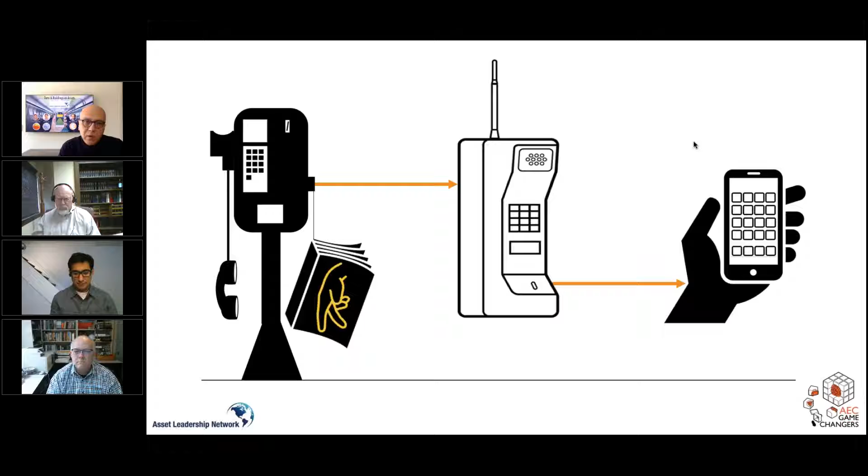So with that in mind, this session is really about the opportunities that we see, and it's not really even about the future, it's about the present. How do we bring the building industry and the asset world into the present and use these technologies?

So our first speaker is Finith Jernigan, author of Big BIM, Little BIM, and the latest book, Big BIM 4.0. Finith, welcome to the webinar. Yeah, thank you, Kimon. I'm real happy to be here and happy to talk about what is a topic very close to my heart. Spent a lot of years on this. Can we go to the next slide then, Kimon?

Okay, so I'm going to continue Kimon's framing of the issues and some of the things that our clients have found to be critical in the last 10 years especially. Over the last 20 years, a lot of the energy from a national and international level has gone to building standards that really are intended for a distant future vision that has always appeared to be somewhere out there, but we're not going to get there for a long time.

As Kimon said, as iPhones and iPads and connected technology have come along, we've been moving away from the core of file exchange, welded together monolithic application-directed tools that are now becoming artifacts of the last century. We're running into a situation where everybody except the AECO industry is really working with standards that are very flexible and easy to use in the real world.

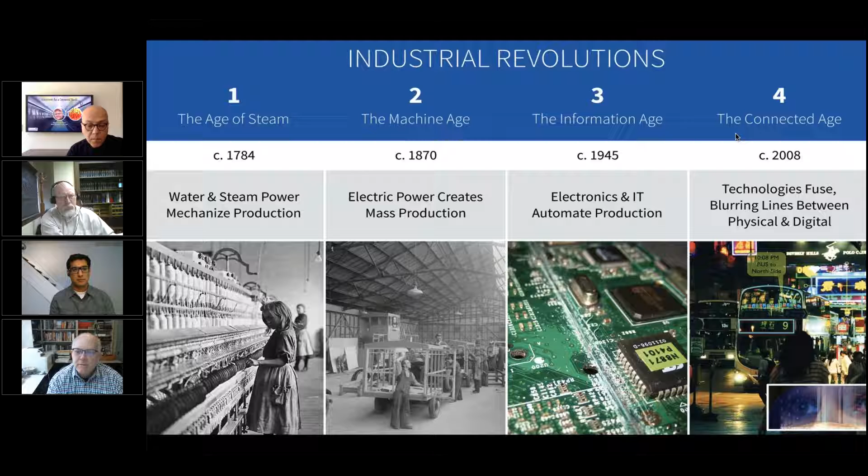We have things still tied into the computer, still tied to file exchanges, whether digital or paper, and yet most of our world is now working with something else. In the AECO industry, we need to find ways to move beyond that.

What's ended up happening, because we've been so focused on what I call Little BIM, the file-centric desktop software side of our world, is the focus has tended to be on the design and construction part of our business. It's largely ignored the balance of our world, the 82% that's outside of that. Even facility management and operations, a really critical part, has gotten very minimal attention in this area. We need to move beyond that.

What we've seen is our clients are really focused on moving beyond just design and construct. It's becoming imperative that things move from construction into operations and maintenance. I think you'll hear when James talks about issues with funding and financing, that whole recapitalize, dispose, acquire piece, and how that affects design, construction, and the rest of the industry, because money, time, and buildings are all starting to merge at this point.

Just so this doesn't seem like something out of the blue, that we're sitting around postulating about possibilities, we started back about 2000. Kimon and I actually worked with the Coast Guard back then, looking at ways to make these transitions. In about 2008, Mike Bordenaro and Kimon put together a program called the BIM Storm.

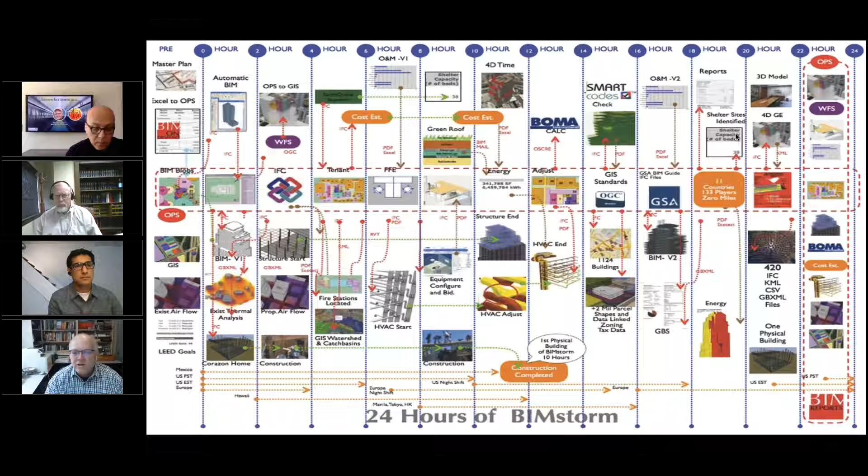This graphic shows some of the data exchanges and information exchanges that happened in that very first BIM storm. Many more have been done since. Kimon is going to show some project work at the end about how these things come together at a much bigger level now. It's become much more sophisticated, nuanced, and accurate over the years.

Basically what's happening is Big BIM, as I call it, sits at the center of an ability to share information from all the different components that make up the built environment—geographic information, budgeting information, facilities management, operation and maintenance, the information built in the models (Revits, Teklas, ArchiCADs and other Little BIM software tools), energy information, live data from thermostats and sensors. All of that now feeds to a central point and flows back and forth within the tools we have available, and it's getting more sophisticated and developed all the time.

As we show these, Dara's going to talk about a major project in China, and Kimon will show some major projects they've been working on all over the world. But these things are happening at a much smaller level too. This is one of my clients, a single facility school district, and people at all levels are using this. It hasn't quite gotten down to tying into residential Internet of Things yet, but it can. It is definitely getting down to the level of tying in at a single school.

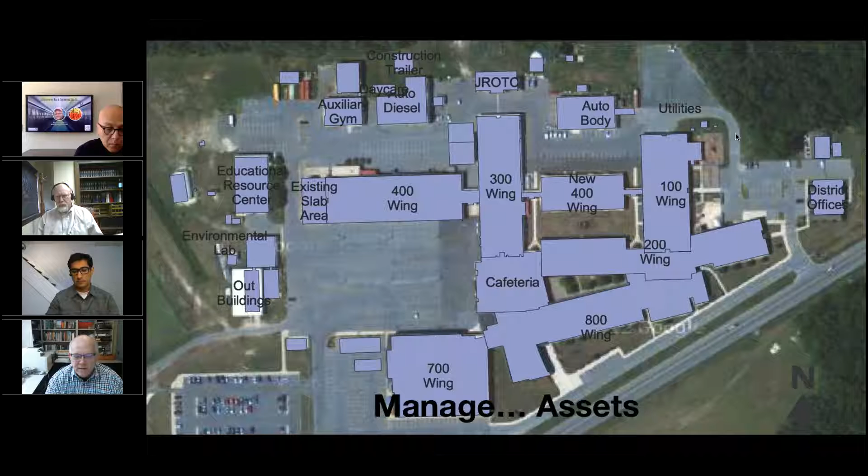One more, Kimon. One of the leaders and first in this - this is a graphic from the Coast Guard, when Kimon and I were working on a project they called the Shore Facility Capital Asset Management Roadmap. People have been prototyping and working on this for many years - this graphic, I believe, was done in 2002 or 2003. So there are people that have been doing this for major owner groups for many years.

One of the first lessons they learned is they had to focus on their assets, not just their projects. When you focus on a project, you're looking at a very time-delineated piece of work - we start the project, we finish, we move to the next. When you focus on assets, you have more of a continuum - you begin to view the world as a continuum. So one of the earliest lessons these clients learned was they had to focus on assets.

And they learned that with these technologies, you can actually connect assets. In the case of the Coast Guard, they were connecting their ships and boats to their facilities to make the interfaces between them work better.

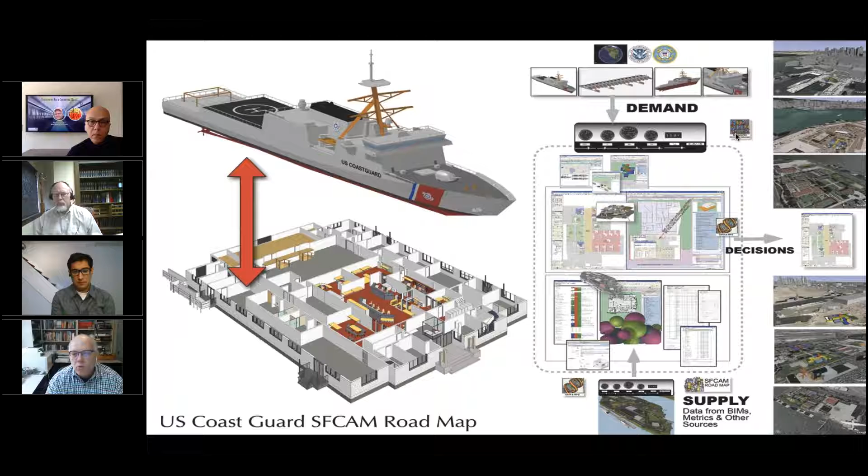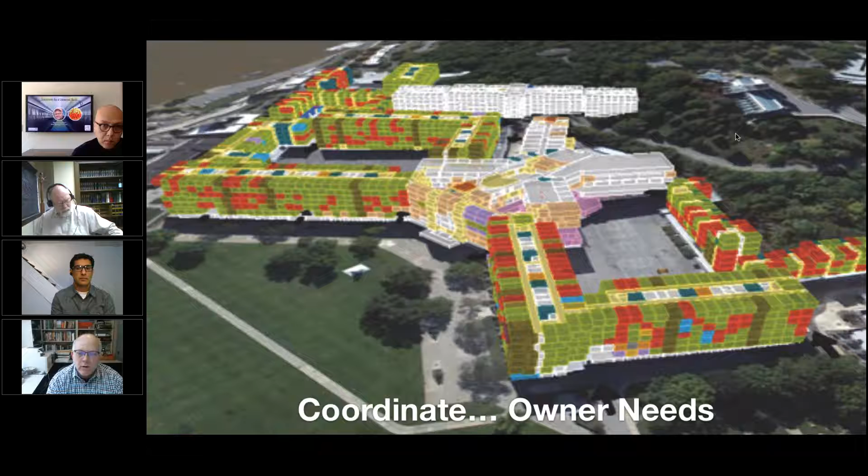Come on, one more. And the Coast Guard's not by far the only one. This is actually the barracks at West Point Military Academy. In this case, the owner is looking at having to do major renovation to historic infrastructure, historic barracks, and they have thousands of cadets moving in and out of spaces. They're having to play the chess game of moving people from one area of an occupied building to another in a very constrained environment, where these graphics show how you manage the overloading of spaces, how you manage crowding within the framework of contractor laydown and contractor access.

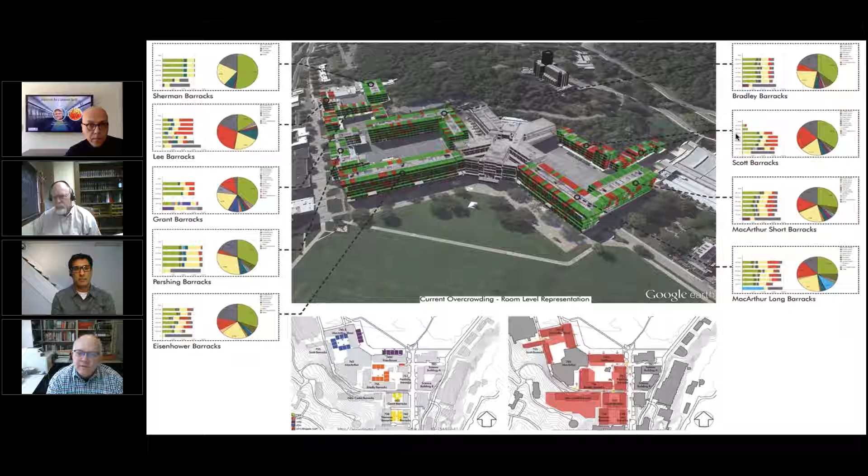So in this case, this is a mashup between all of those things to be able to study them in real time.

The clients doing this type of thing have now gotten to the point where they're able to create views of their information all the way from the satellite view, zooming right in down to the smallest widgets. These are what I call little red blob models - they're just screenshots of live data, in this case on Google Earth, where you zoom into a campus, then into the buildings, but at every level the data is live. You can get to any data at any granularity you need, and manage millions and millions of square feet, hundreds and thousands of buildings, all in one interface, where before these were kind of rigid, fixed-point graphics. Now every one of these blobs is a live model.

The one on the left is actually a model that we generated for my new book. It's publicly accessible, where you can actually see how you can drill down into these.

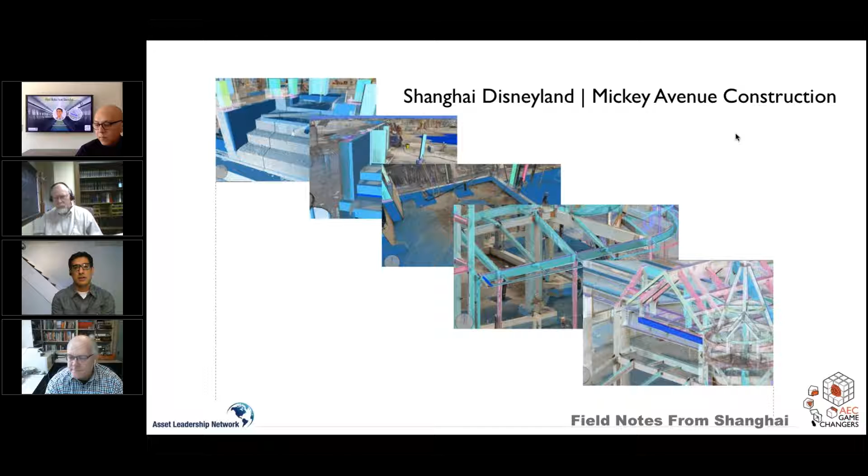Thank you. Can we go to the next slide, please? This presentation will be my field notes from my experience at Disney Shanghai. I was involved with this project for about 2.5 years, and I spent time on site during construction of the park.

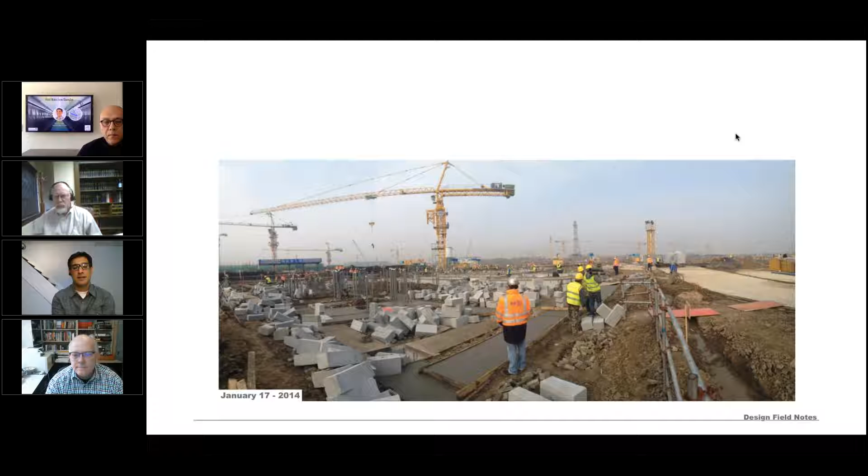This is an image of the park on January 17, 2014, about 3 years ago, showing 1.5 meters below the finished elevation of the park. Contractors and workers are there, CMU blocks ready to pour the foundation. From there we had to go to this: 2.5 years later, on June 6, 2016, when the park opened. It was a very fast-paced project relative to its sheer magnitude.

The orange area is the area I'm going to focus on. This is called Mickey Avenue, the equivalent of Main Street in any Disney park, very typical, on axis with the castle. I was involved with 4 buildings on Mickey Avenue.

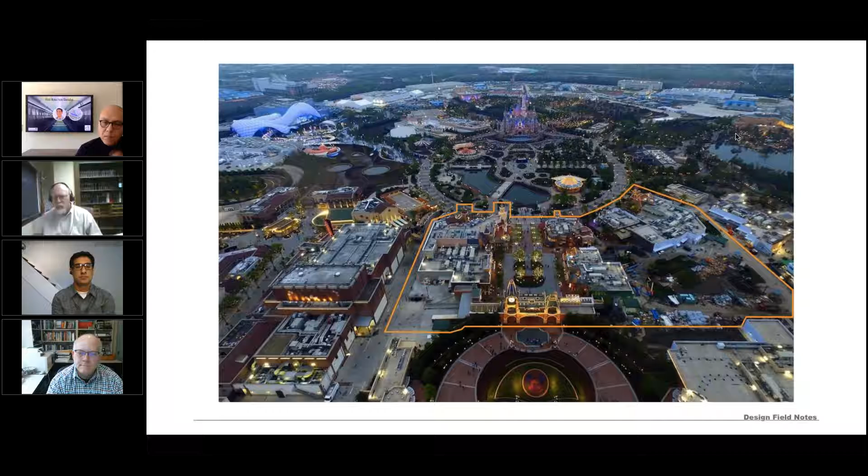The buildings on Mickey Avenue consisted of character facades. We had about 70 numerically assigned facades, and each facade, as it turned different corners, would have more, so we had about 200 facades to work with.

One of the main ingredients of a facade in a Disney park would be TCP, themed cement plaster. We did a very rough calculation and had about 8,000 square meters of plaster to work with. It was a daunting task.

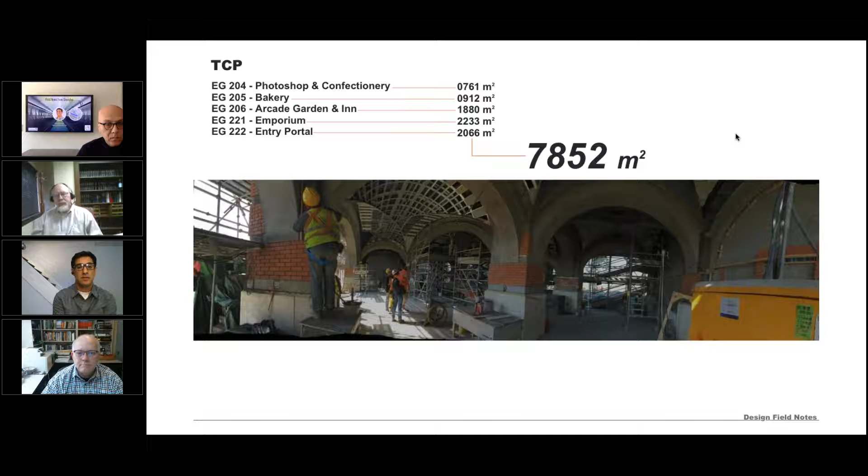During construction, we had close collaboration with construction workers, the CM, art directors, and also a creative director going from facade to facade to make sure everything was happening correctly based on the design intent and the drawings.

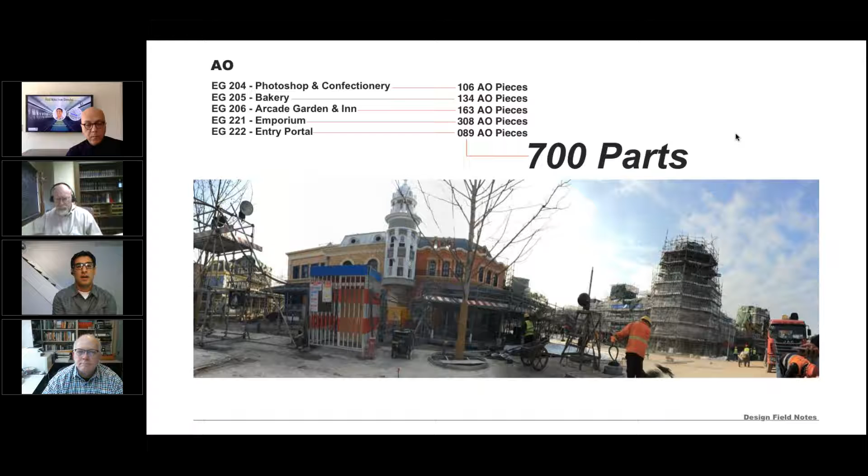Another ingredient was the AO, the architectural ornamentations attached to the building. We had about 700 parts, but each part had sub-parts, so we had thousands and thousands of pieces we had to keep track of prior to and during attaching to the building.

The building structure was quite simple. We had a spread footing, and the footings were attached to one another using grade beams, then we had stem walls, and the slab would rest on the stem walls.

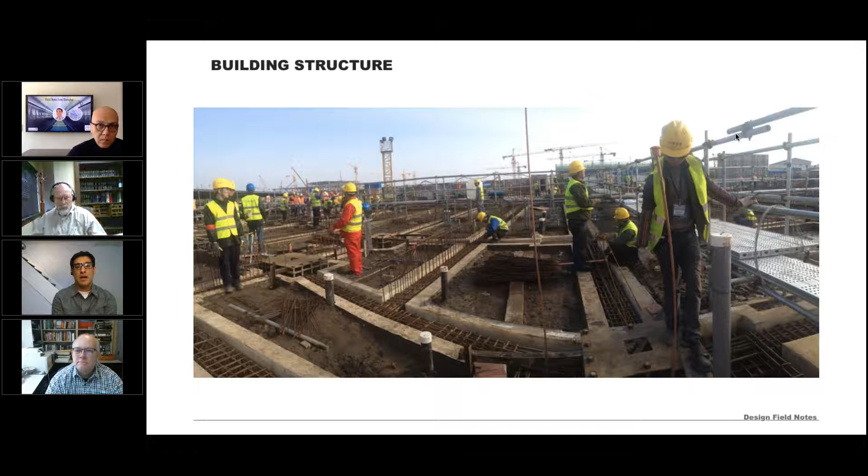This is an example of the first building. The contractor decided to use CMU blocks to do the formwork for the foundation, which had a very irregular geometry. But he also decided to tie the rebar cage away from the foundation and then lower one geometry to another, which caused a lot of problems. The sequencing was all off, and we lost about a week from our schedule.

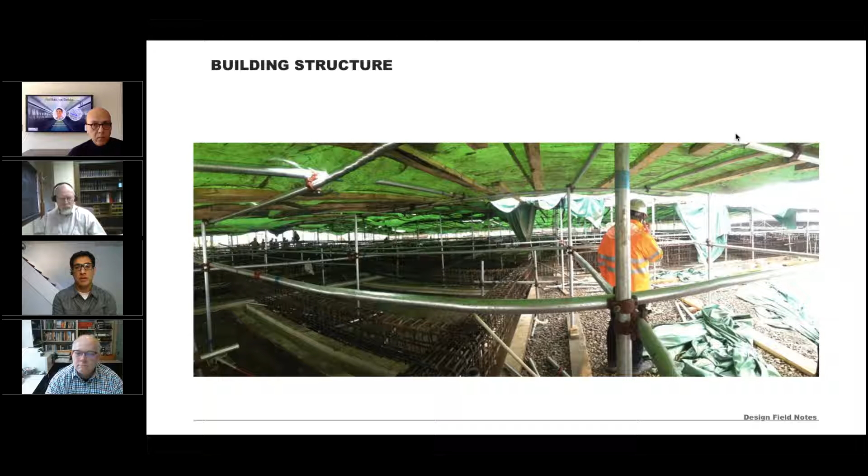So that was the time that we knew we were going to have a lot of problems ahead of us, so we had to come up with solutions.

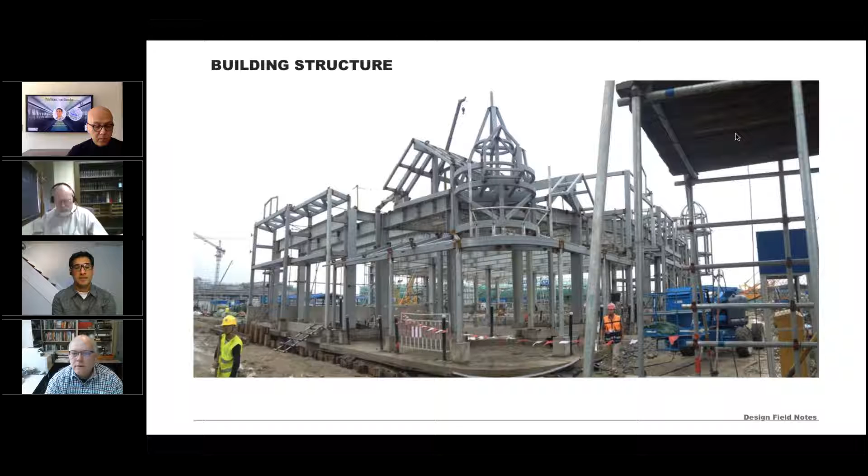This is a typical building structure. The building would divide up into two segments: the primary structure, a steel moment frame, and the secondary structure, which was welded connections connected back to the building. These secondary structures served as a skeleton of the facades.

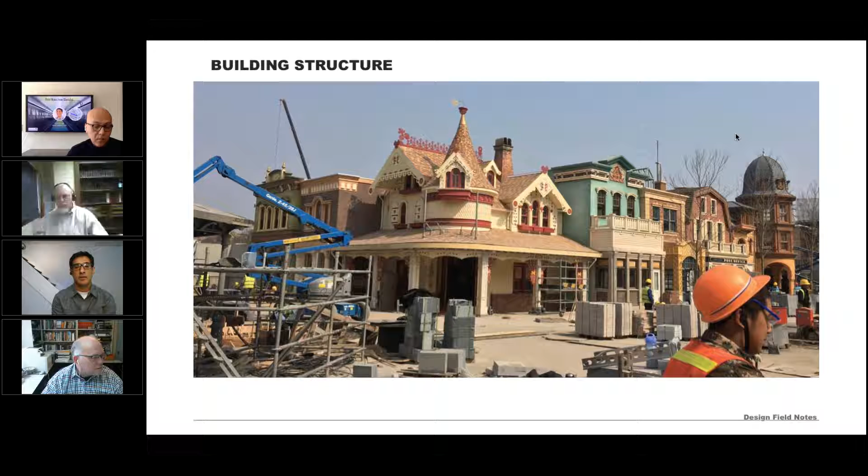So it goes to this. That was a building about 85% done, and you can see a lot of activity going on at the same time. So sequencing was a major challenge, and also being able to allow all the trades to work with one another to hit the deadline.

So the challenge for us was how to keep track of all this. This is another view of a facade. There are many, many stakeholders involved with a themed building. Our job as architects was to get all the input from the stakeholders and aggregate all the information. One of the things we did was rely on software for the long term.

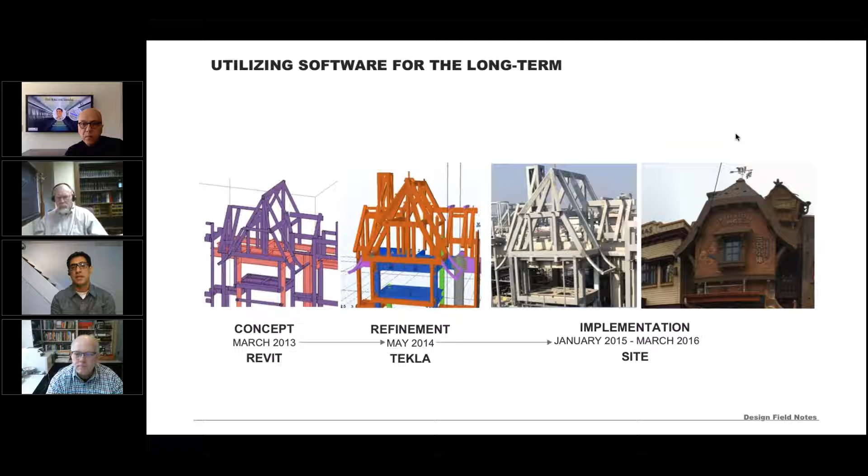This is an example of the evolution of the structure of one of the buildings. We started with Revit, had all the information in Revit, then migrated it to Tekla for the structural model. From the Tekla model we created fabrication drawings, and from fabrication we were able to do the framing of the building. As you can see, March 2016 was the final product. So it was a 3-year cycle, but we were able to use software for the long term.

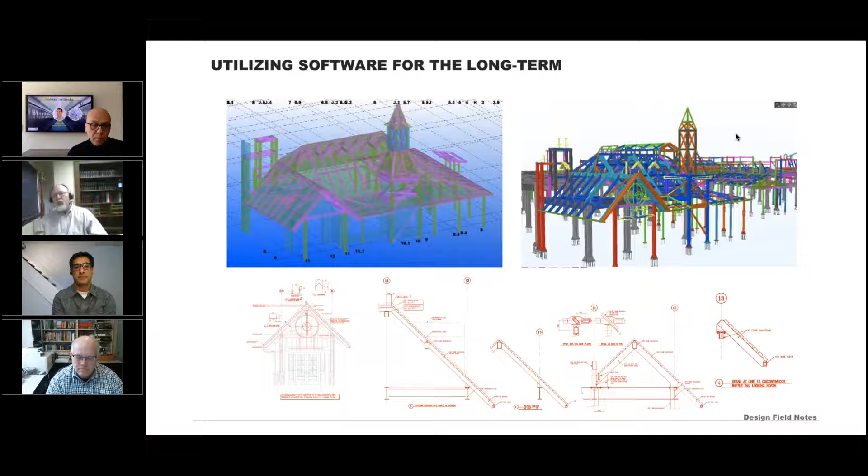And that's another example of utilizing Revit, utilizing AutoCAD, utilizing Tekla, and viewing things in BIMsight to be able to ultimately construct the facade. Next one, please. And that's a view of the facade when it was done.

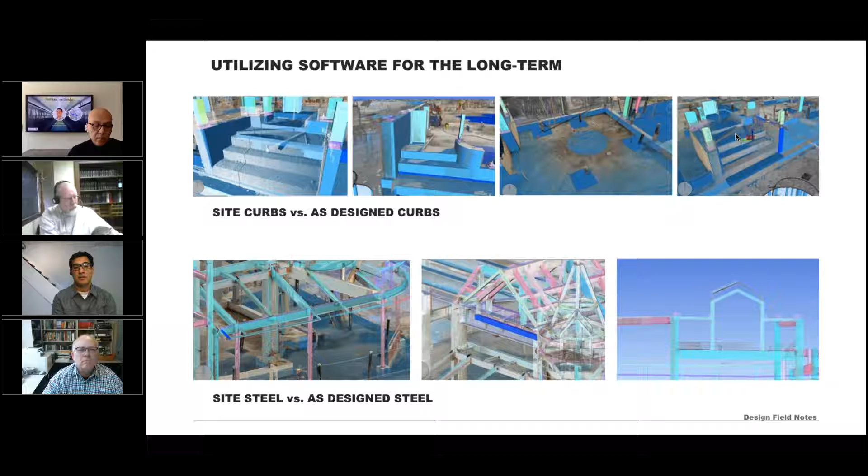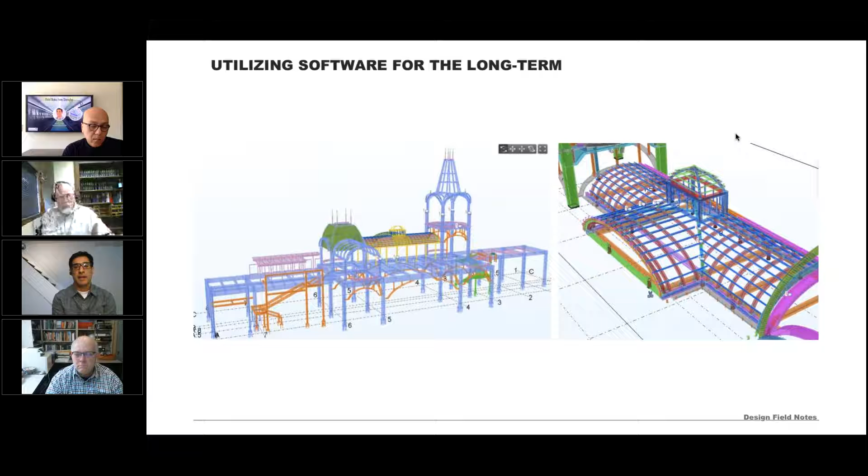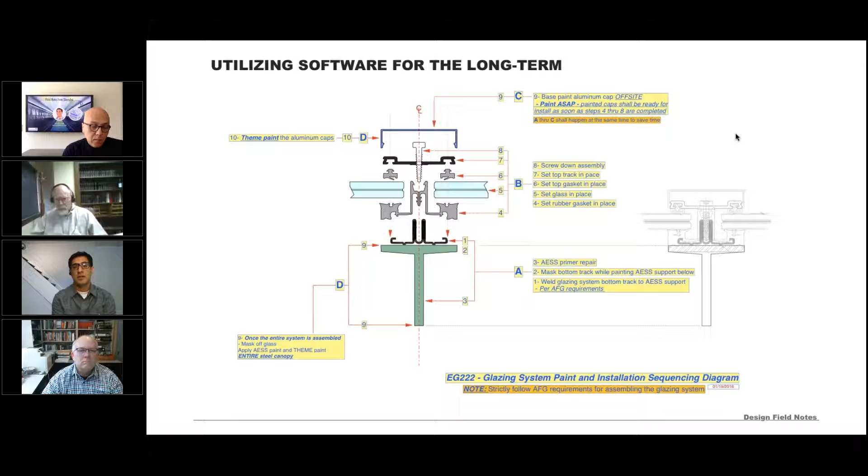These were models that we did with the contractor, layer by layer, to be able to control the geometry in the computer. We did sequencing diagrams for the contractor in order for them to install it properly, because sequencing was a major issue, especially in the Chinese market. As architects in the US, we don't really dictate sequencing or means and methods to contractors, but over there we realized we really needed to do that to get the job moving forward.

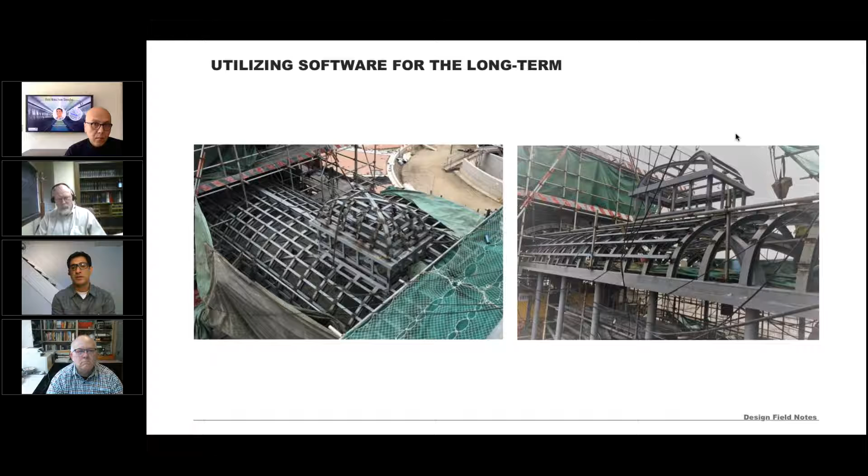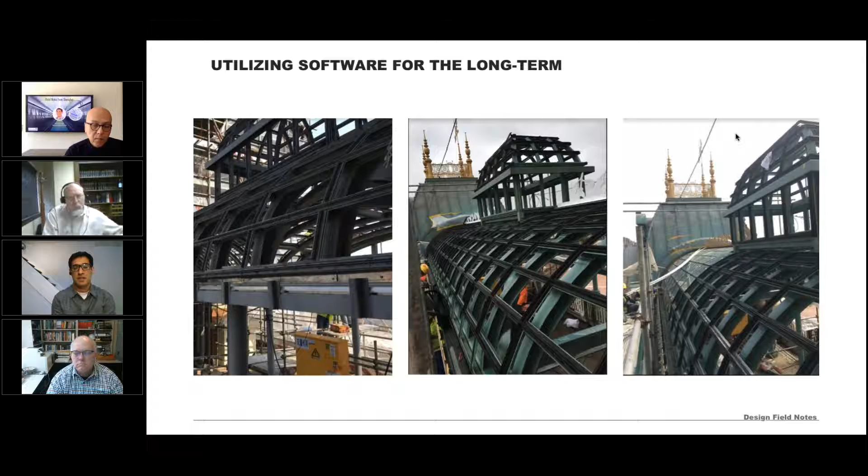We would show up to the job site every day to document the progress on the canopy. This is when the secondary steel, or miscellaneous steel, would come in - we'd photograph it and compare it to the information in the model. The next day we would come and document the installation of the different components of the canopy, such as the bottom track, the gaskets, the glass - and every piece of glass was numbered based on the panelization exercise we had done earlier. It went forward, and this was the final product.

Go to the next one. So for us, the challenge was that we realized during the project, if we were to be in reactionary mode and react to everything one problem at a time, we would not be able to get the job done. So we decided to invent processes as we went. We got into tactical mode. We had architects, construction managers, and contractors all working together every day, going facade by facade, fixing problems.

We worked outside the initially agreed upon boundaries of the contract. We just went in - if there was a problem, we would fix it right away, and we would move from problem to problem to be able to deliver the job on time. This is an image I took a little bit before the park opened. We had a soft opening, with people walking around.

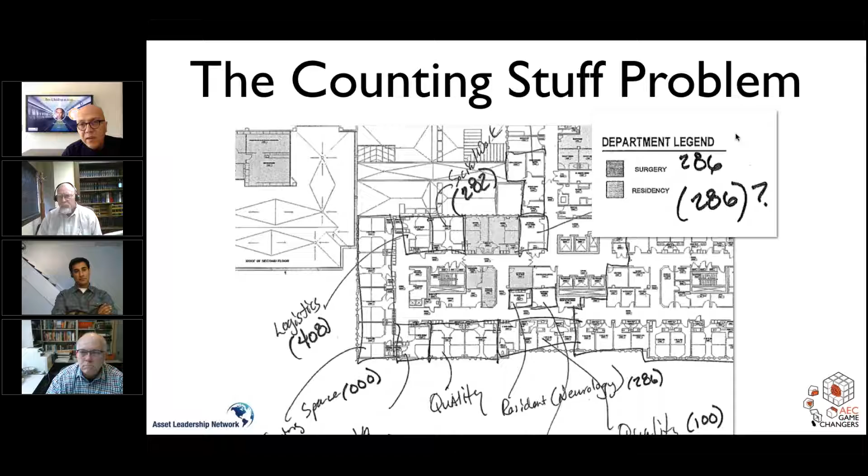And as James showed, really data doesn't matter what it is—it could be data about contracts, budgets, or buildings. It doesn't matter what you call it, it's all just data in our world. And the strength of understanding this domain of being in the building industry is we understand how this data is connected to location and parts of the building. Just like Dara showed, we get really into the nitty-gritty and understand how buildings go together.

And that's a unique expertise that we're not really leveraging and using efficiently. That's an opportunity that if we don't take right now, we are going to miss it.

This is a National Institute of Building Sciences series of projects for the Department of Defense, Defense Health Agency, and Department of Veterans Affairs for healthcare facilities. But if you take the word healthcare out of this, it could be anything - it could be Disney, it could be school facilities. Essentially, it's a collection of information in static format that is on websites or in documents used to define the requirements for a project, for example. If you're going to contract for a project, like James said, if you don't have good information going in, how are you going to even track whether it comes back to you in a way that's deliverable as an owner, that is of value to you?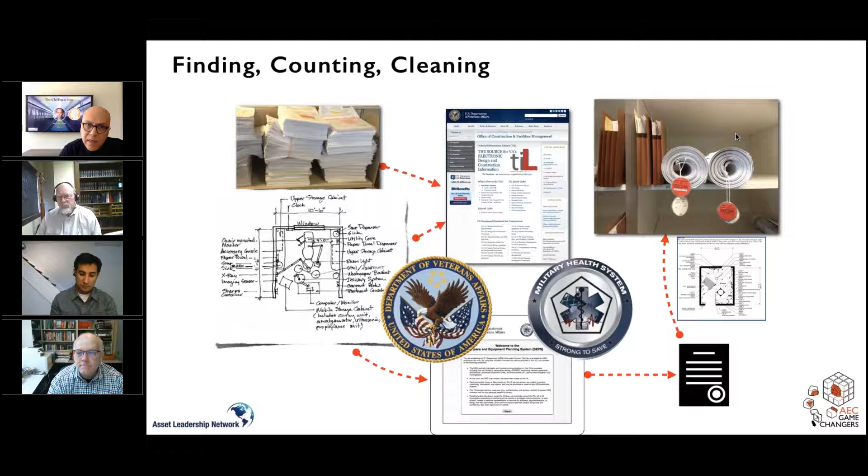And that's what we looked at - we looked at these documents. If you squint and look at the thousands of pages of documents and PDFs that were, in fact, produced even by BIM, but then stripped away back into documents, you can see the value inside each word there, but you can't get to it. You literally have to sift through this information to get to it.

The other challenge in the building industry, with Building Smart Alliance, Building Smart International, and the AEC industry, is that a lot of our projects are very monolithic in nature. They're kind of a large file that we put stuff into, like James described, and then we have to get the data out of, and define the standards of how we transfer this data. All very important topics and standards that need to be developed, but in many ways they're really trapped in the 90s - it's that paradigm of let's put everything in one large box and then try to get it out to the next team.

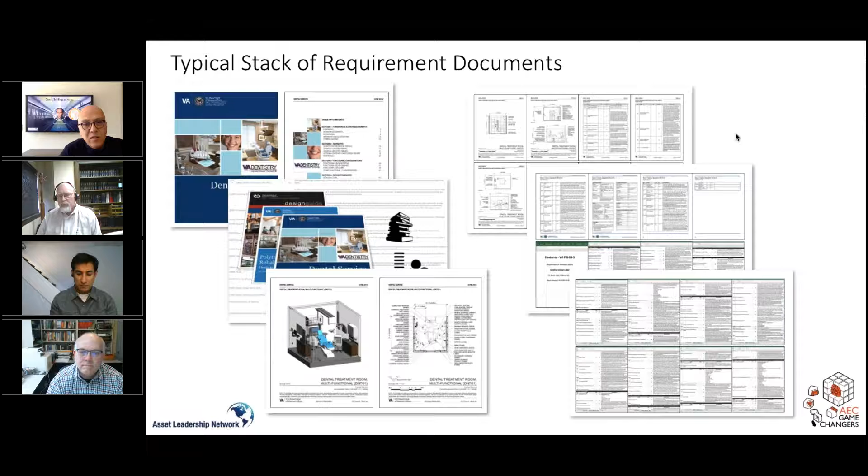But the world today is not about files anymore. It's about transactions, just like Bitcoin - small, simple transactions that are incredibly powerful and fit into the larger picture.

So we're familiar with vehicle identification numbers, basically a VIN. It does not have to be complex. That's another challenge we've had at Building Smart International and Building Smart Alliance over the years - we spent a lot of time developing standards, documenting them, putting them into binders and distributing it. All important stuff, but really if we start with just the very simple stuff - that ID - if you track that ID about a vehicle, you can track what happened to it, who owned it, what accident it got into, what was done to it, and even how you dispose of it. What's the value of that as it goes down the line? It's just that simple ID - it's not a three-dimensional beautiful model of the vehicle, it's an ID attached to that.

And that's what the building industry and the asset world really needs to think about - how do we think in terms of taking an owner requirement, for example. Owners have requirements for a healthcare facility, and this is actually the NIBS project I mentioned earlier for VA and DHA, Defense Health Agency. You have a stack of documents - when I say documents, they could be PDF files or even BIMs. They're just a stack of things that you can't get information out of very easily.

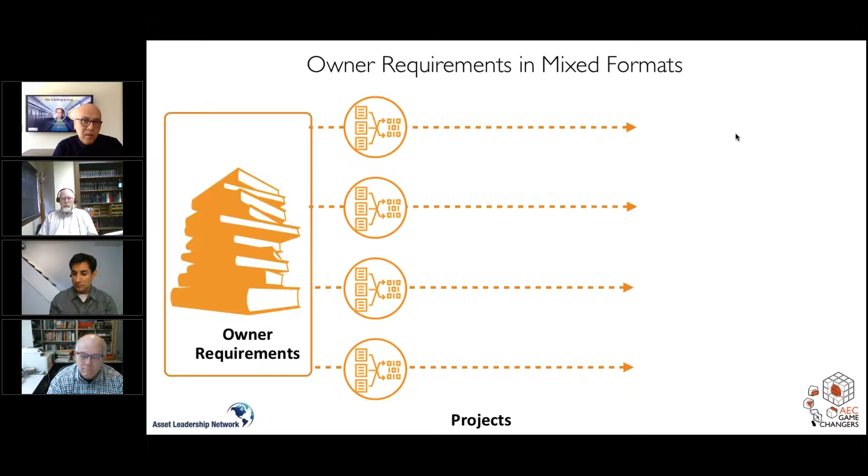Then the owners say, we want to hire an architectural team to build this project, and we're going to hand them the stack of documents that are not coordinated, by the way. There are conflicts because there are static files from years ago even that are parked on a server somewhere, saying, here, go get this requirement for a hospital. And then the architects have to be paid to digest all this data, reverse it, and then design and build a project. They deliver that data back to the owner and say, here you go, here are your assets and information that you manage for the life cycle.

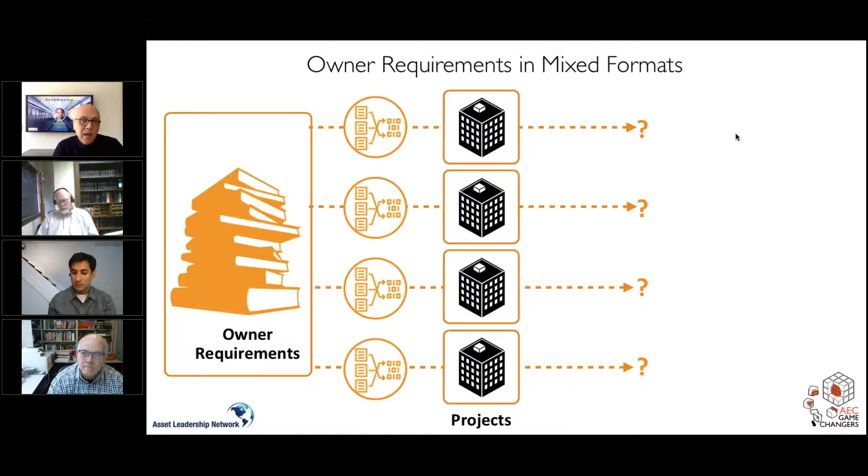If we don't have consistency of what we require and how we use this data, we're not going to get into a world of managing assets in the life cycle consistently. And it does not have to be complex - I want to stress that over and over again, because BIM can be incredibly powerful and valuable for a project, just like Dara showed.

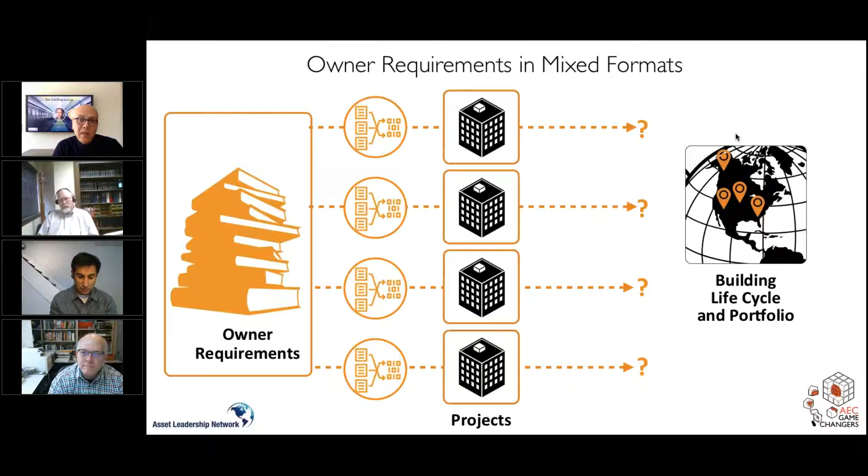A lot of the information that owners are looking for is very simple—we want to track this piece of information, just like the vehicle or blockchain that James talked about. It's very simple stuff from a technical point of view. We're overcomplicating the development of standards and the building up of capability for the industry, which makes it difficult to implement. We have to start simple and start implementing before continuing to develop standards.

In the space and equipment planning system, we guided owners on this approach for the National Institute of Building Sciences project. We said, you have data and knowledge in a database that's not accessible—make it publicly accessible on the web. If you go to seps2bim.org, you can get to their knowledge base and tap into it with a transaction: what do you think you need to go into this building, what type of equipment, what type of spaces. With that simple rule, it can be applied to projects across the board consistently, delivering data back to asset management in a consistent format.

This is already possible today. It's just about issues with contracting and industry being ready to do this. The amount of waste that goes into a project, like James talked about, is astronomical. We went to a presentation last week where it was said that up to 80% of the effort of digesting and getting data into a project is literally waste.

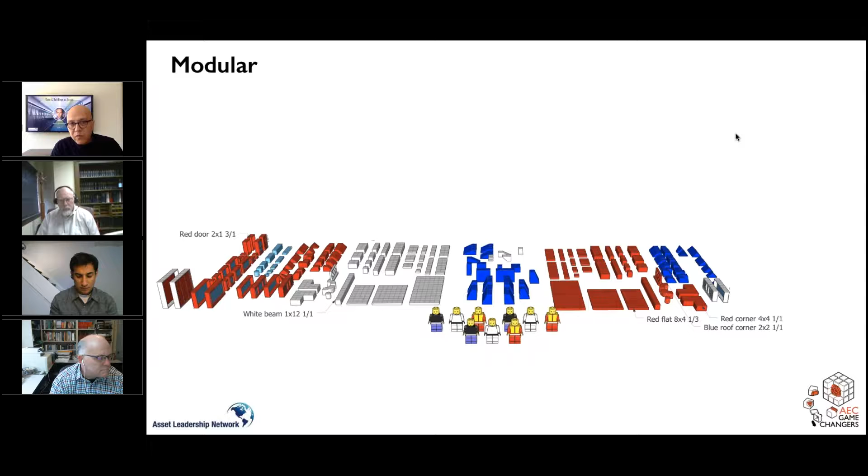It can be automated. So how do we get this value add? It doesn't have to be complex—that's how the web runs, that's how Bitcoin and blockchain took off. It's simple transactions with simple instructions, just like Legos: here's the kit of parts we need to build a building, and when that building is delivered back to us, we want them named in a certain way so we can track that asset down to the component level.

What was that pane of glass that was put into that canopy in Shanghai Disneyland? It has an ID associated with it—it started somewhere. So it's not only about modeling the detail of the building, but getting the data to flow, because that's the first thing. The data associated with that geometry lets us track that asset for the life cycle. Technologically, that's already a done deal—it's already been figured out in other industries. We're just way behind in the building industry.

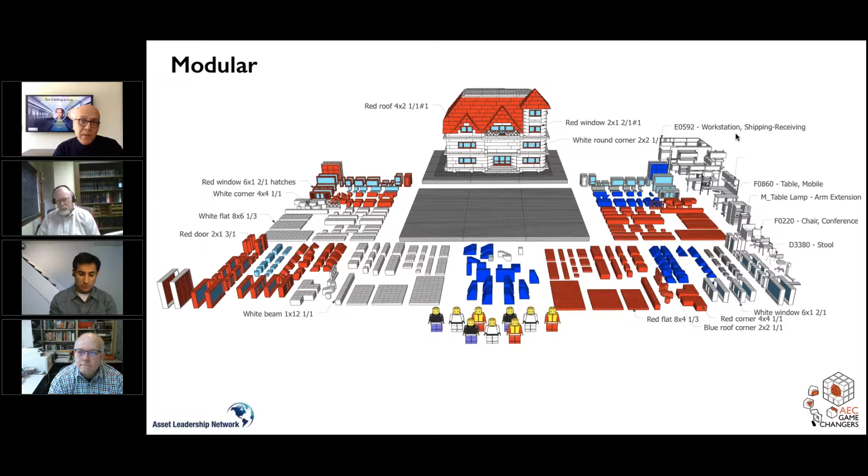Which means it's an opportunity for us to manage these assets more efficiently. So we challenge the industry: think in terms that owners have data and knowledge, and you have the capability to plug into that and pull that knowledge as a transaction. You don't need the entire data set—just that little bit of information to do the work you need, whether it's a financial, legal, or construction transaction. It's not a monolithic model only. The model is important, but to track assets we need to think in terms of getting into modular, smaller pieces. That opportunity exists today.

The other message from the NIBS, National Institute of Building Sciences perspective—this is another ongoing project with the State Department. Other owners are seeing the same type of value that can be applied to their projects. So it's not just for healthcare, not just for large projects, not even just for large AEC teams. You can have a very small team of thought leaders, like we've been showing here today, to actually have a lot of impact.

The other message is to think in terms of open source tools. There are proprietary applications out there that are incredibly powerful and important for our industry, but we need to think about how to open things up and connect the dots, just like Bitcoin and blockchain did. It's about open access, controlled access—not a free-for-all. We've initiated open source tools at the Building Smart Alliance that are on GitHub, for tracking assets and information for a project. I know other organizations like BIM Forum and Building Smart International here in the US have been doing this as well.

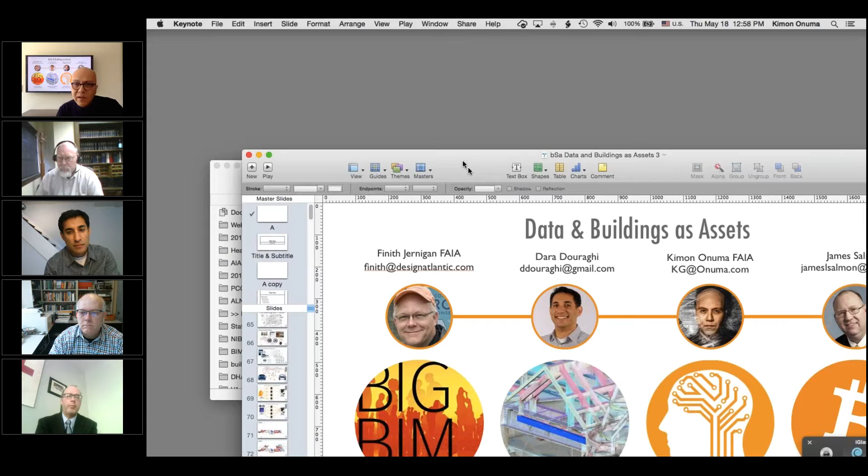Great, thanks. We're getting close to the end of the hour here. Is there any final statement you'd like to make, Mike? Is there some wrap-up you'd like to do, or anybody else? Just jump in.

Well, I'd like to thank all of you for taking the time to put together this flood of information. Dara, that was just really incredible to see what was done in such a short period of time and how the documents were maintained and could be used going forward. James, you always have new and leading-edge things to say—let's try to get that message from Delaware up to the federal government. Asset Leadership Network will help you with that. And Finith, you always put things in a way that makes the big picture clear and simple. Kimon, that goes for you also.

One of the things that's really great about this coming together is we're talking about breaking down silos, and by having the National Institute of Building Sciences buildingSMART Alliance Thought Leadership work with the Asset Leadership Network on a webinar series that included support from the National Academy of Sciences, I hope we're breaking down some of the silos ourselves too.